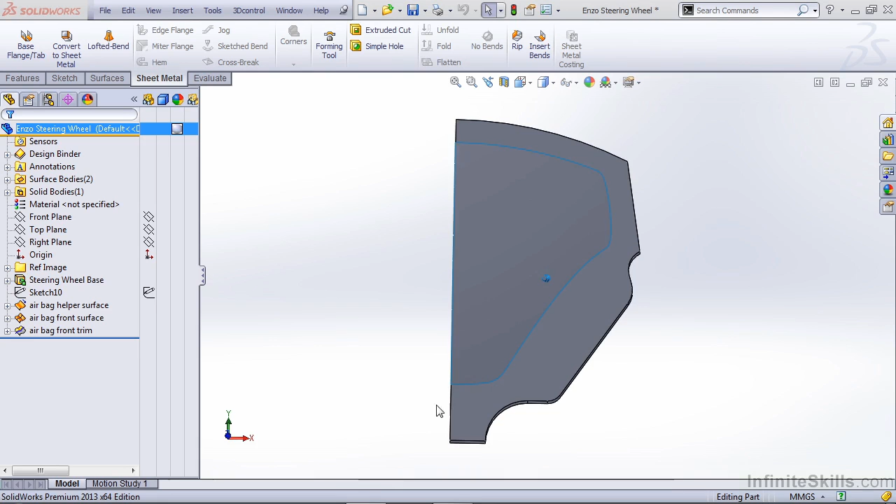Now I want to start by pointing out that we spent a lot of time on our trim sketch for our last surface.

It's important that we deal with the curvature in the sketch because that's going to create a good or a bad surface. To start off our new surface, we're going to start a sketch on the front face of our steering wheel base. Go ahead and turn our sketch picture back on and take a look at what kind of curvature we need to create.

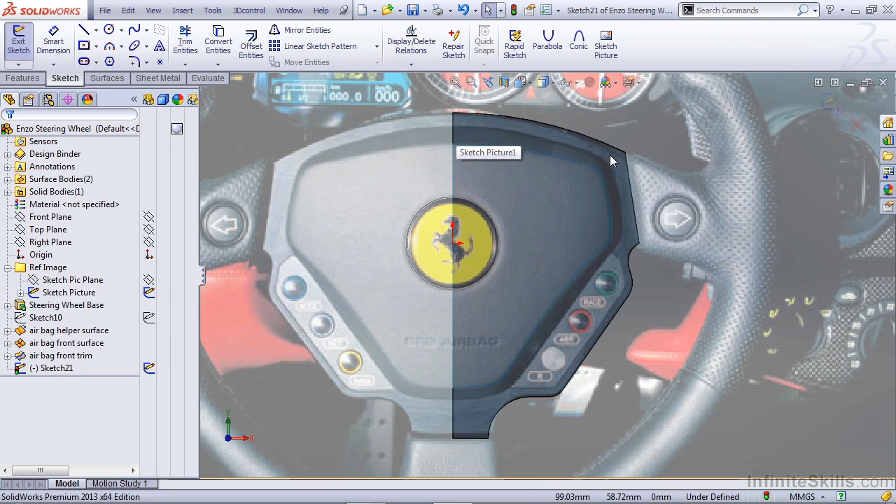The first thing I want to create is a 3-point arc. We're going to try to mimic this top edge of the lower surface of the airbag. So we're going to start by snapping to the center, drag it down roughly about where the curvature starts to change, and get it as close as possible.

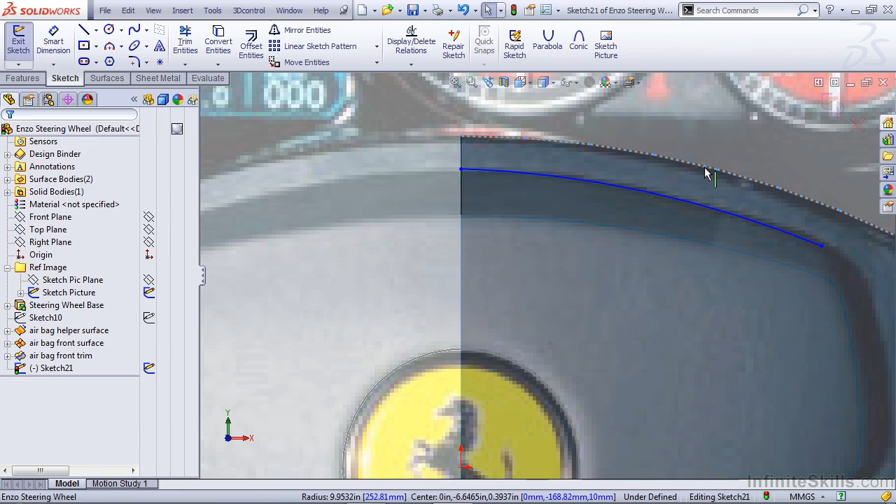The next thing we want to do is select the top edge of our steering wheel base and control select the arc. We're going to make these concentric. Once we drag this into an appropriate position, we want to go ahead and fix the endpoint.

As long as the right endpoint is close to the curvature of the picture, we can go ahead and fix that as well. So now we have a 3-point arc located roughly the same curvature as our sketch picture.

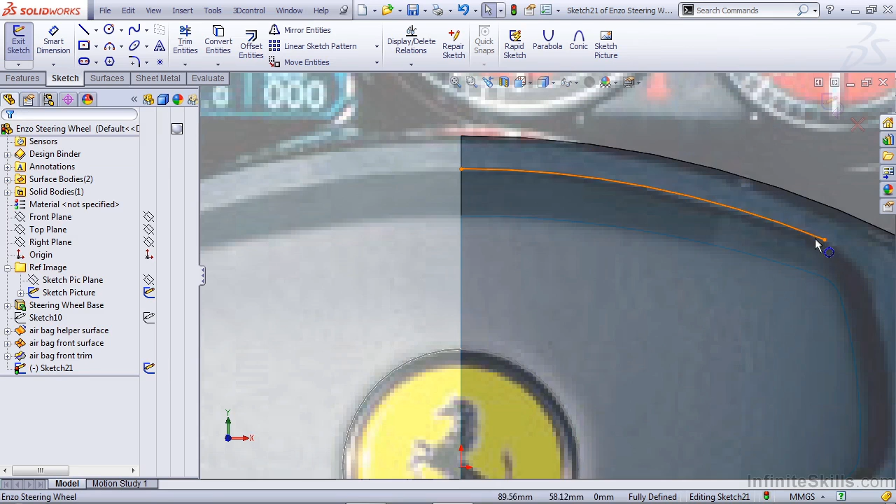It's important to note that there's a lot of pixelation, so you're never going to get an exact replica because the resolution of the picture just isn't there. So we want to make sure we get it close and base it on surrounding geometry, such as the curvature we used to create our steering wheel base.

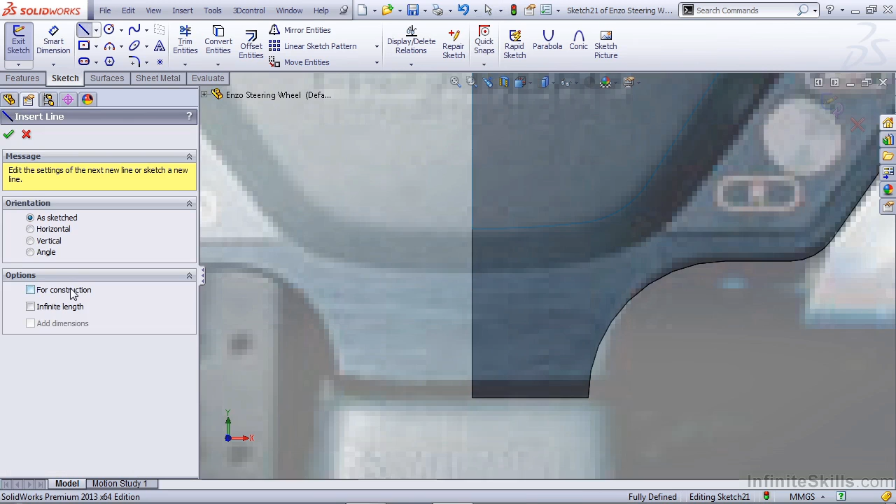The next thing we want to look at is creating the bottom edge. Now we don't have any surrounding geometry to help add relations to this, so we want to start by creating a line. We're going to make it for construction, drawing it horizontal and snapping to the center.

I want to make sure that this line is fixed, then start a new 3-point arc. I'm going to snap to the end of that line, drag it to about where you think the curvature starts to change, then we'll go ahead and roughly place the curvature.

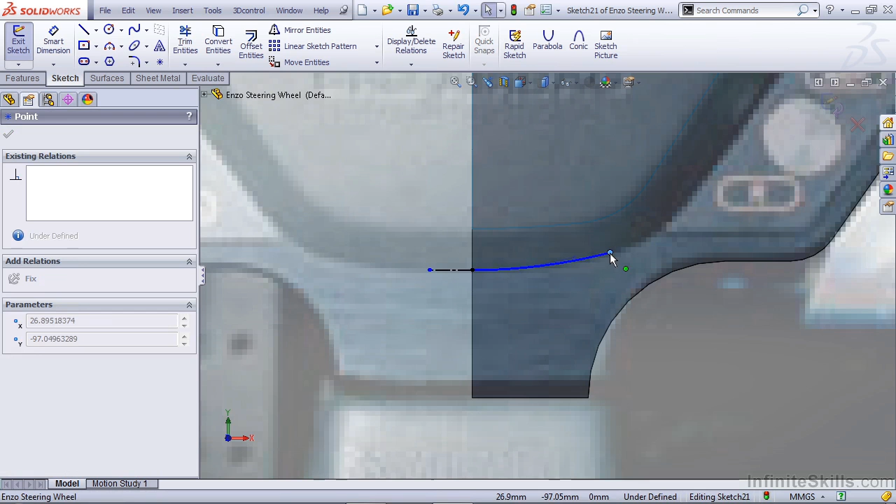Now with this arc, we want to go ahead and add a tangent relation with that straight line, and then drag the end around to make sure we're matching the curvature as best as possible. Then we can fix that endpoint as well.

Let's move on and create some more geometry. Now if you remember when we created the steering wheel base, we used a straight line for this segment. It's going to best represent the geometry we can see on the sketch picture. So I'm going to use a straight line for this inside segment, making it as close as possible.

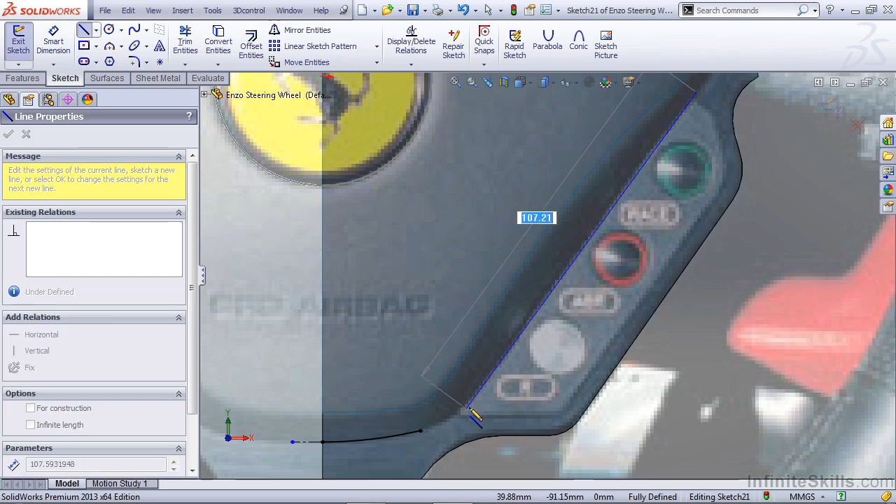Then we're going to apply a parallel relation to that outside edge. Again, we're never going to be able to exactly replicate based on the picture alone. The picture is going to have a certain amount of skew.

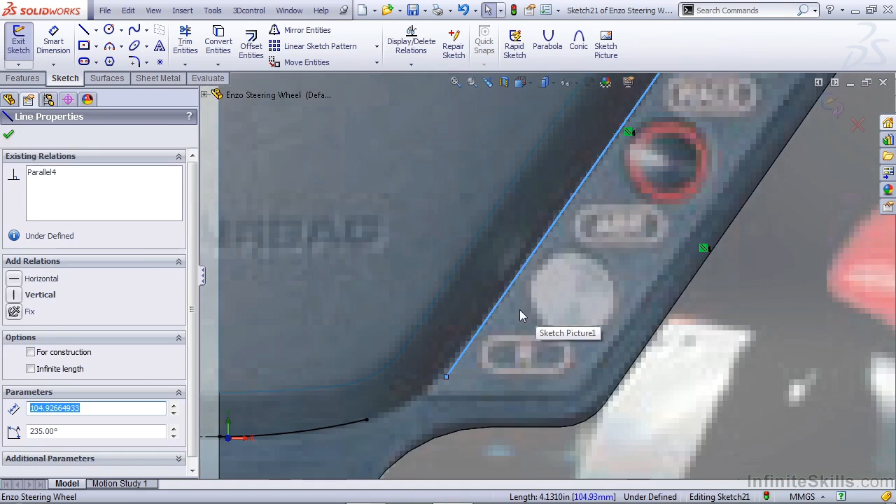We know based on some earlier videos, where we mirrored the geometry to the other side, that it doesn't match exactly. So the fact that this line doesn't exactly match the picture isn't a huge deal for us.

We just want to make sure we base everything as much as we can on the surrounding geometry we decided to create. So now that we have this line roughly in place, I'm going to fix its endpoints.

Next, I want to take a look at adding a spline between these two. It's important to note that when dealing with geometry such as this, where we've fixed relations, you can often get errors when you go to fully define your sketch.

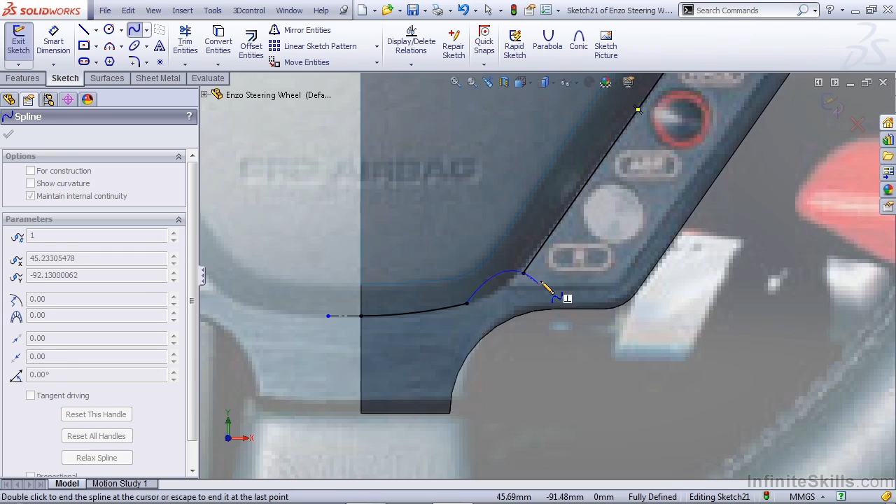So let's start by drawing a start and endpoint spline by snapping to each of those, hitting escape to end the spline, and then let's add some relations here.

One thing I want to note is that when we're dealing with splines, we have two handles on either side. If we apply a tangent relation between the 3-point arc and our spline, that's only going to drive the direction of the handle here.

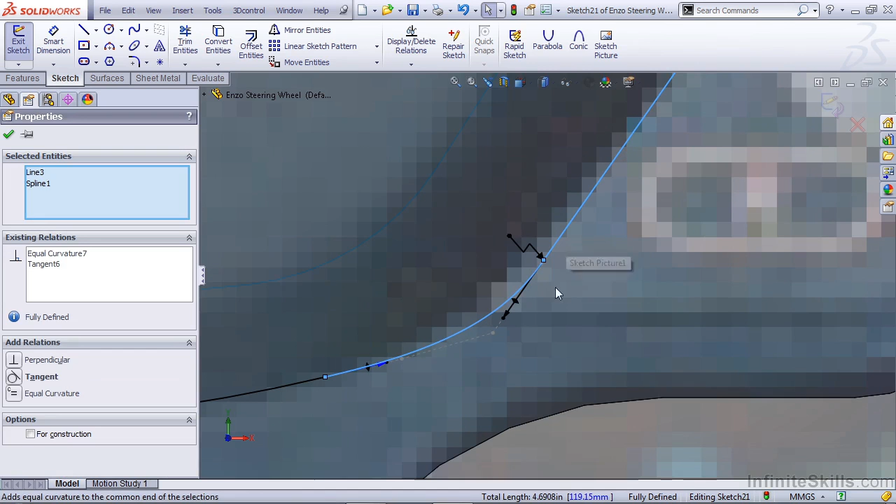If we apply a curvature relation, grab this line, grab the spline, do equal curvature, it's going to apply both a direction and a weight of this handle.

Depending on the surrounding geometry, it's important to understand the differences and know when to apply them. In this case, I applied an equal curvature relation, but this line is straight, which means it doesn't have a radius of curvature. So I'm going to go ahead and undo that. What I want to do is simply apply a tangent relation there.

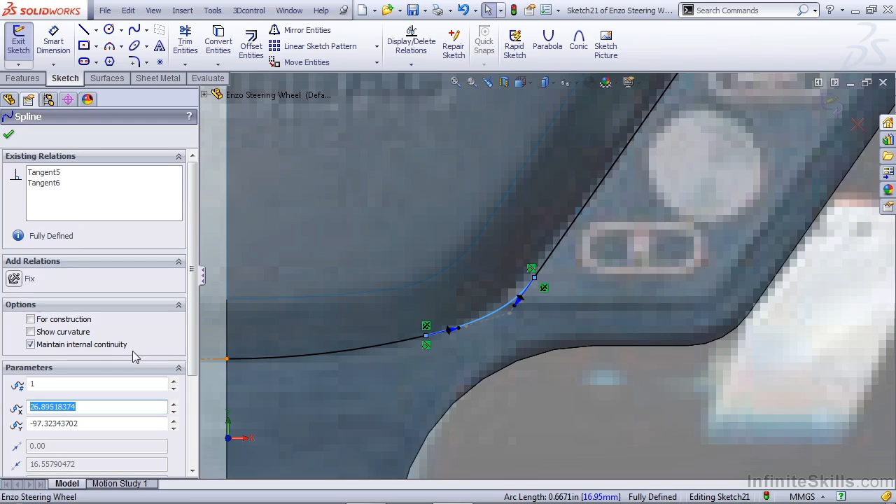For the relation down with our 3-point arc, the arc has a constant radius of curvature. That means we can give this a set number. For instance, if this was a 100mm radius, that 100mm radius would carry into the spline. For that reason, I'm going to leave both of these ends as tangent and make sure my curvature combs look nice and smooth. I'm going to make sure we didn't induce any sort of funky relation in the middle of this spline, and I'll go ahead and leave that on.

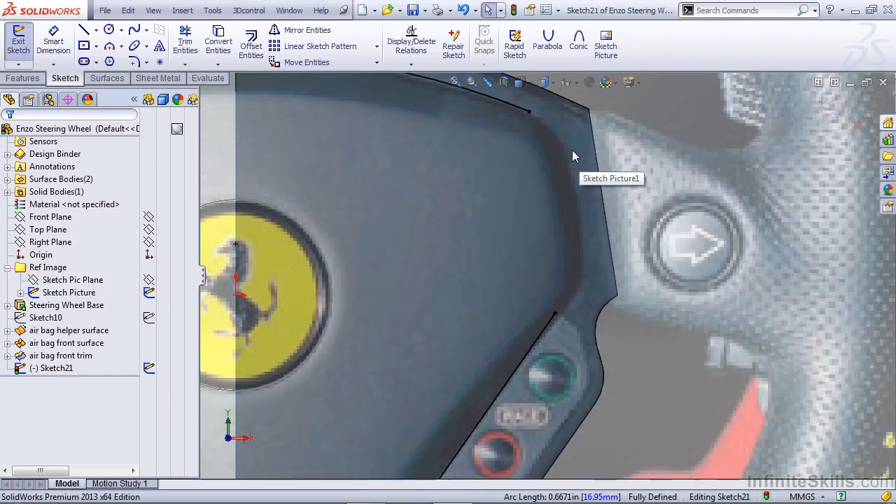Next I want to create some geometry to fill in this section. We could do this with 3 separate segments, similar to the bottom section, or we could try one spline. Let's apply one spline and see what we can do to get the curvature right. Again, I'm going to do a start and an endpoint spline and apply some relations here - a tangent relation here, and a tangent relation up top.

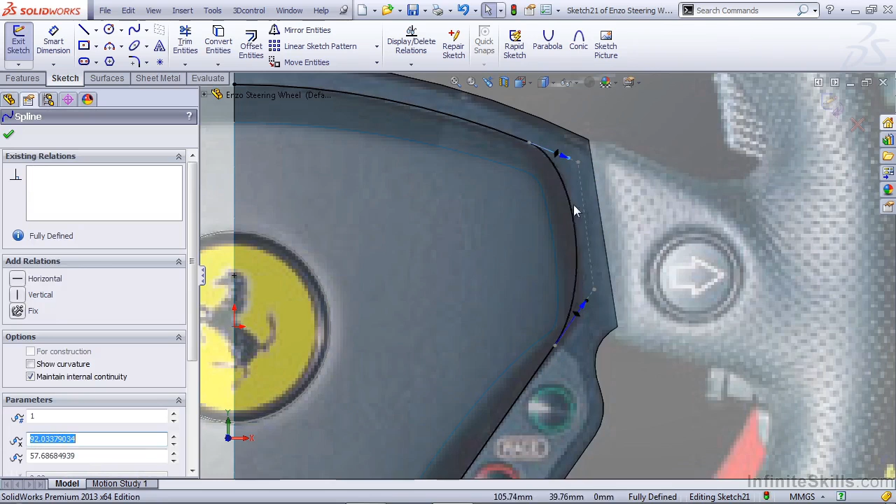Notice the geometry doesn't match very well. We can drag these handles around, but we're never going to fix that geometry because it's got a different set of curvature in the middle. So if we right click on this, we can insert a spline point, left click on the spline, and help drive some of this geometry by changing the handle in the center. I'm going to drag the weights around and move this point around.

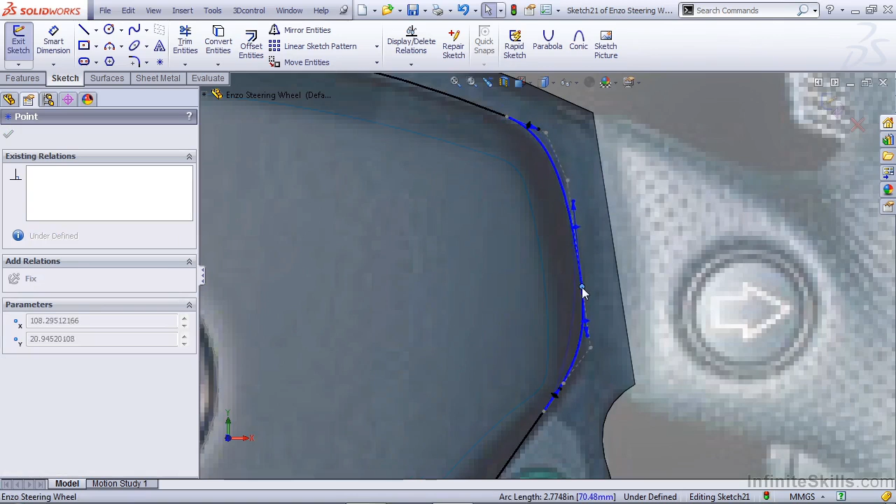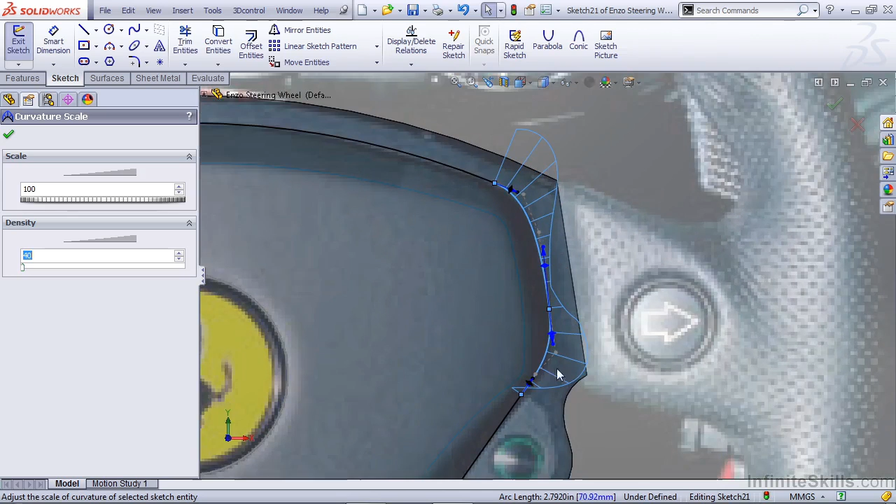It's important to note that you don't want to add too much curvature here. We want to be careful that we're not inducing any issues in the curvature combs. You'll notice by adding that midpoint, or third point, we're actually adding a reasonable amount of curvature right here in the middle. The reason I mention this is because any issues with your splines and geometry in this sketch can show up later in the surfaces.

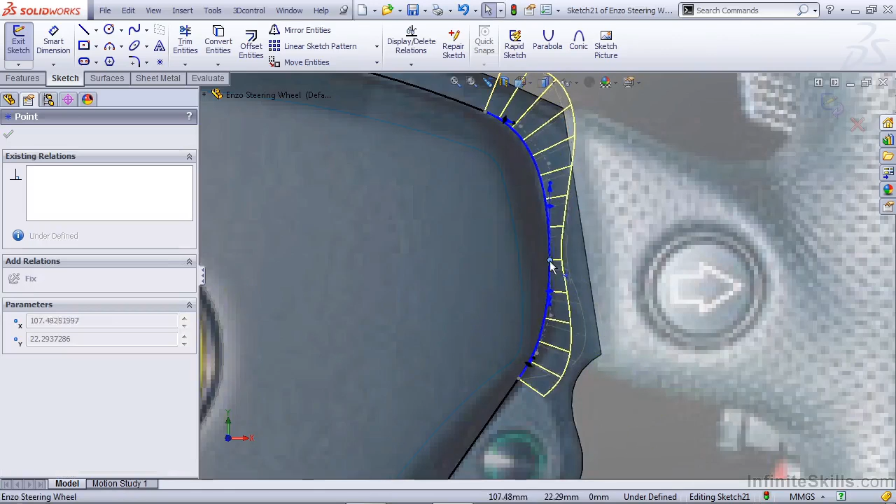Right now you can see we have a changing curvature really close to where this handle is - we go from concave to convex. By dragging these handles around, we can change that drastically. So what we want to do is pull this handle around and see if we can get a reasonable association without inducing too many problems into the curvature here. We can move these handles around and play with the geometry. I think that looks pretty close, so I'll go ahead and OK that sketch.

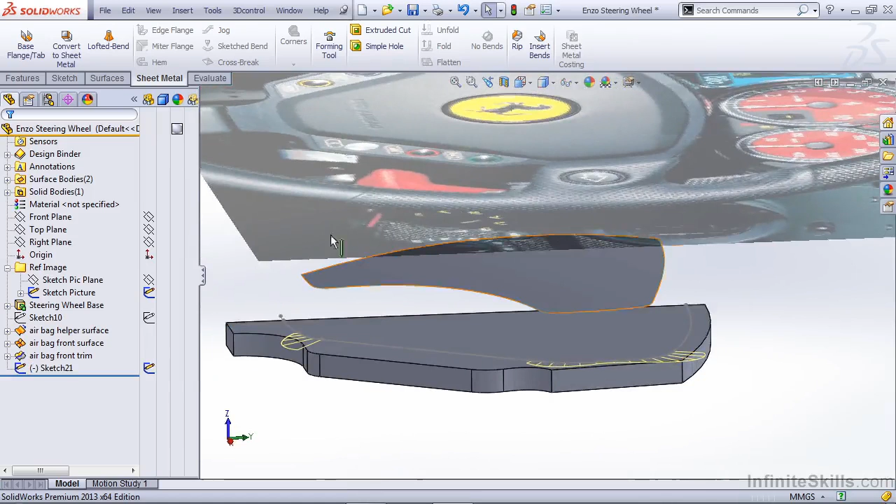I want to create a boundary surface between these two. Now you might be wondering why I'm not creating geometry between the endpoints of this - well, I want to be careful not to over-define my surfaces, because you have a lot of tools at your disposal for creating references and geometry between these.

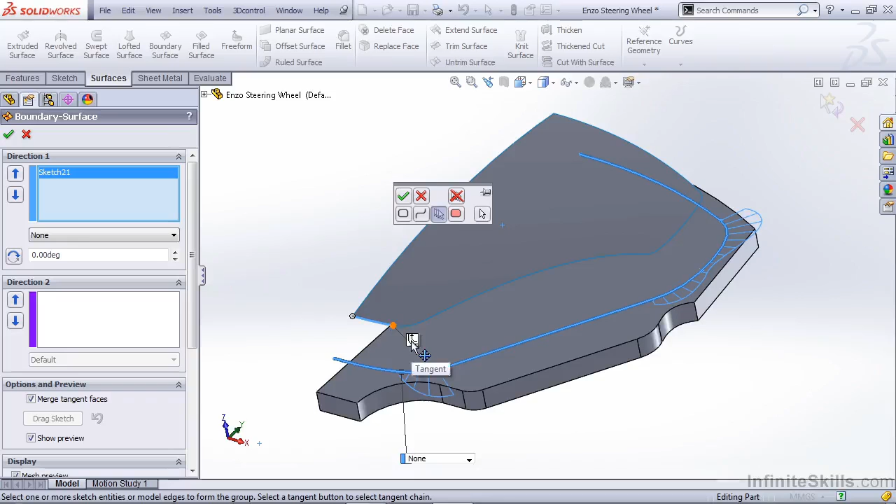So let's start by doing a boundary surface. Going from this edge, I'm going to right click, use my selection manager, grab this one edge, hit this button which will grab all the tangent entities, and hit OK. You can see we're creating a boundary surface between these.

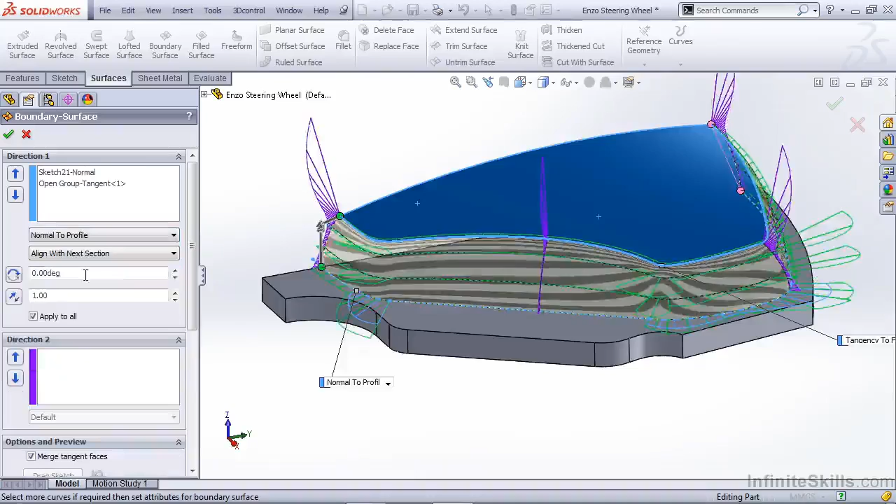Now I want to add some relations here. With this open group, I'm going to add a tangent to face relation and give this a 0.5 weight. With my sketch, I'm going to add a normal to profile, but change the degree - I'll give this a 10 degree, make sure it's going the right direction, and give this handle a 1.5.

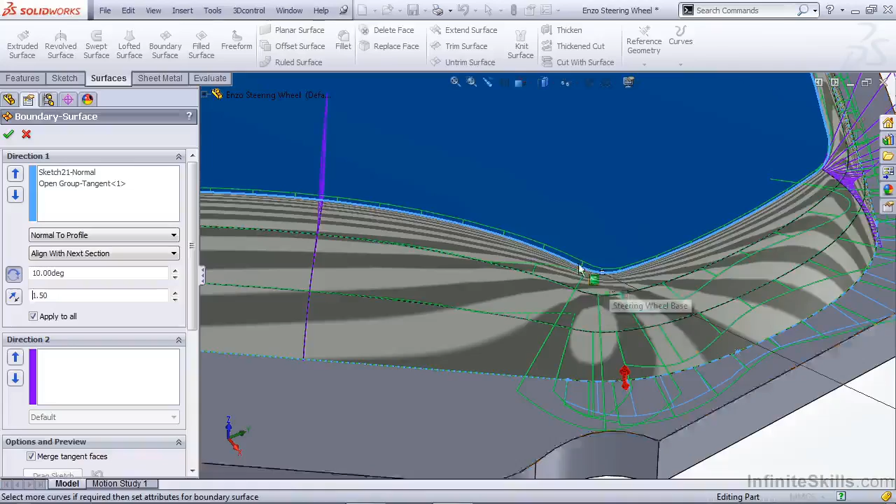So we get a preview on the screen, and you'll notice we have some interesting curvature in our zebra stripes in this area. If we look at the curvature getting close to our surface, the combs go out quite a bit. Closer to the bottom where our steering wheel base is, it's a quite smaller degree of radius of curvature. This is going to show up for us in our surfaces, so you need to be able to drive these or play with these.

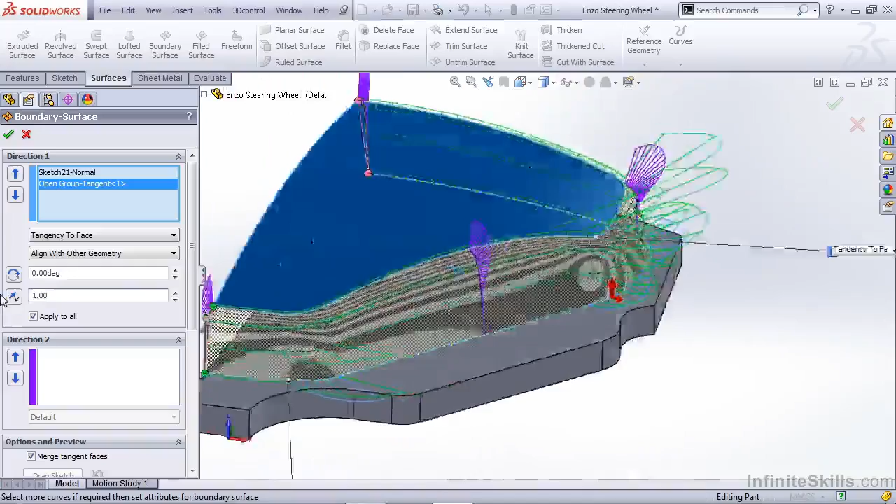In general, you're not going to create a surface this big in one shot - you're going to want to define certain areas to help drive your shape. But in this case, we're going to go ahead and use one surface and play with it and see if we can get over those shortcomings of creating a single surface.

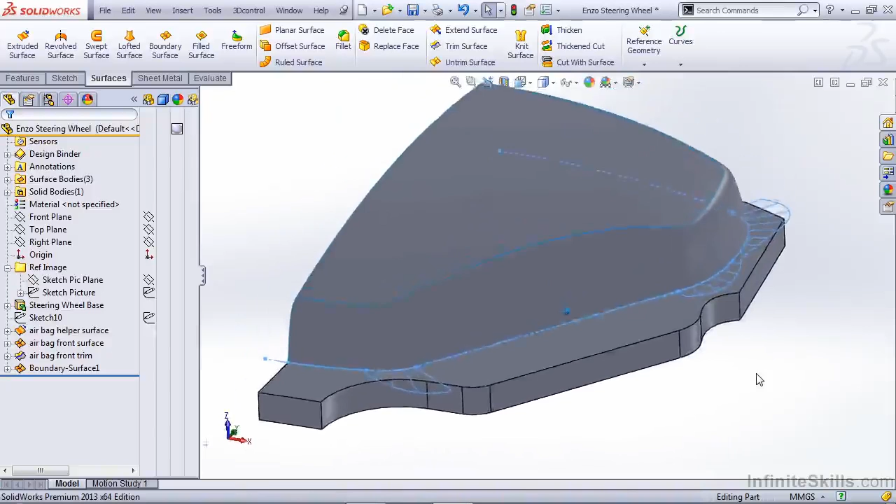I think this is a good place to end this video. So let's take a small break and we'll come back and take a look at some of the issues we've created with this surface.